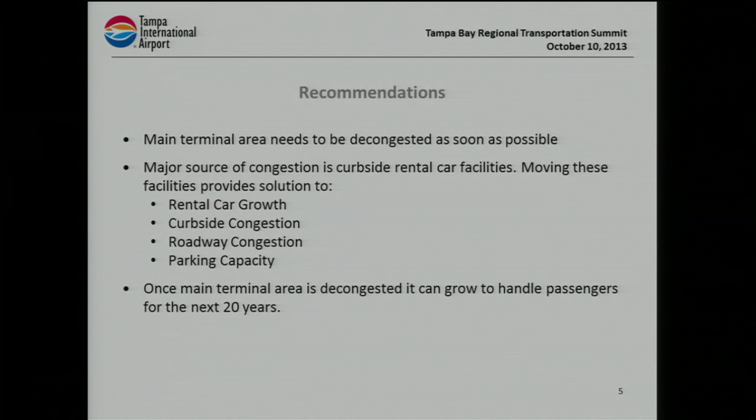Major sources of congestion are solved by moving the rental car growth problem, curbside, roadway, and parking capacity congestion. And so here it is.

We talked earlier about what our vision is and what we can do to top what George Bean and the guys did. I challenged our master planners. They came back to us with their first phase, and they said, okay, we're going to build another parking garage, and we're going to build another rental car center over here. I said, that's really boring, that's not very imaginative. They said, yeah, but it's cheap. I said, it's cheap and bad. Go back to the drawing board and do something better than what George Bean did. And I think we're there.

This calls for a $935 million first phase. It creates more than 10,000 jobs, and it's underway right now. So this isn't a regional plan that's on the shelf. This is a plan that's happening today.

The major projects are a 2.3 million square foot consolidated rental car center. So we'll move all of our rental car operations to the south, right here. And that does a number of things. It takes 8,500 cars off our roadways, because these people have to come up and back to our main terminal. This is an area of congestion.

What we have to do is move them away. Now you can get right off the highway and return your rental car, and we never interact with those 8,500 car trips a day.

That'll be connected - we're going to go back to the future and use George Bean's idea - by a 1.3 mile automated people mover. This isn't an idea that's being floated about. This is something that's been approved by the board in concept. The board will vote on the budget for this in November, and the design build contracts will be let in the first part of next year. So this is underway, and it'll happen by 2017.

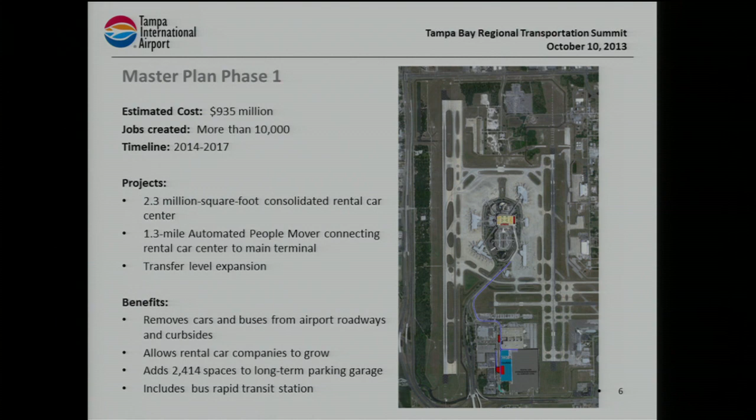So you could take - one of these days we'll get a nonstop bus to downtown Tampa. I know I've said this before, I got a nonstop to Zurich, but I can't get a nonstop to downtown Tampa. One of these days there's gonna be a bus that drops me off right here, and I'll get on this train and come right to the terminal. It's coming. Okay, so a little bit more detail on this.

We will have the APM, automated people mover, travel here. It'll be up about 85 feet in the air, go under taxiway J. We'll have to reconstruct this taxi bridge, go along here and stop first at the economy garage, which exists today. This is served with a busing operation. We'll get rid of all those buses, save the money, save the labor, save the environment, take those buses off the road, and those people can ride on the train.

And then the next stop will be the Consolidated Rental Car Center, which will be spectacular. It'll be 4 floors, with fueling capability on each floor. The rental cars can be turned around in 15 minutes from the time someone drops it off till the time it's re-rented by someone else. Hugely efficient. And then, of course, a bus rapid transit station.

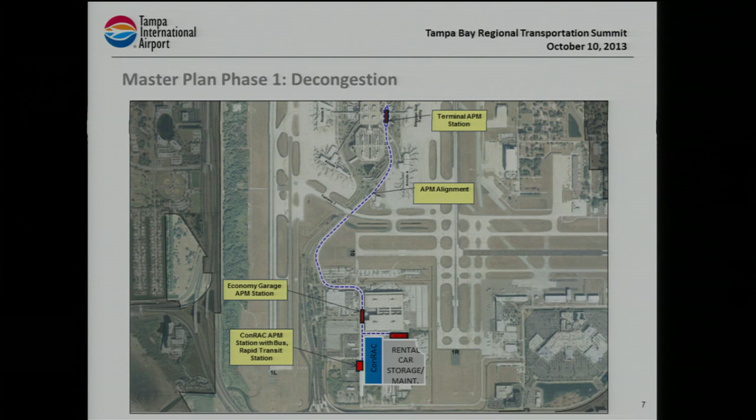Other buses off airport hotels can drop off there too, and we take them off our roadways and decongest all of those problems. Ultimately, we'll also move our employee parking down here, which is up on the north side of the airport. It's a busing operation, and we have to cross an active taxiway, which the FAA frowns upon for aircraft-bus interaction.

So they kind of like this plan too. When you're done, we have about 15,000 people in this area between economy parking, employees, and rental car guys. So this is where transit-oriented development comes into play. We have to develop real estate at the airport to drive our revenues up, because we know our airline revenues are going to be flat.

So we put a gas station down here so the rental car guys can gas up and return their rental car. Or if you're at the cell phone lot, you can gas up, get something to eat, wait at the cell phone lot. You could even pick your party up right here at this curbside, or they could take the train down to the south. You just tell them, I'll pick you up at the rental car center. It creates another curbside, thereby reducing that congestion.

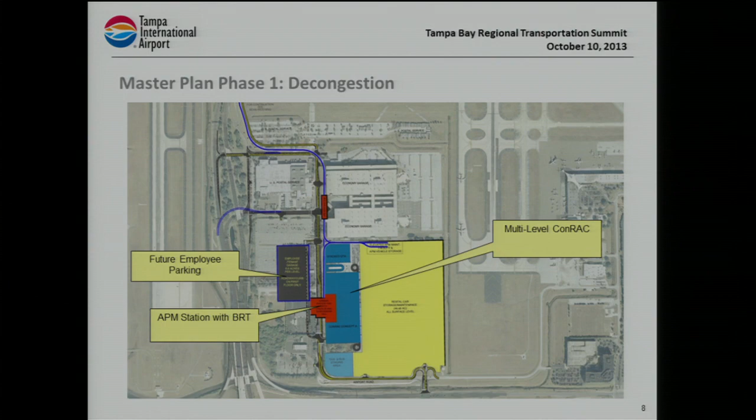We could build a hotel here. We could build office buildings here. There are a lot of opportunities. You could put a pet hotel down here for people who travel and have pets - this is a new popular trend. This whole parcel of real estate becomes enabled by this rail connection.

This is what the automated people mover station will look like at the terminal. It will actually connect to the terminal in between airsides A and C, so you use shuttle bays for A and C. There's a smoking deck out there if you can envision that - when you leave today, go take a look. That's where this will be.

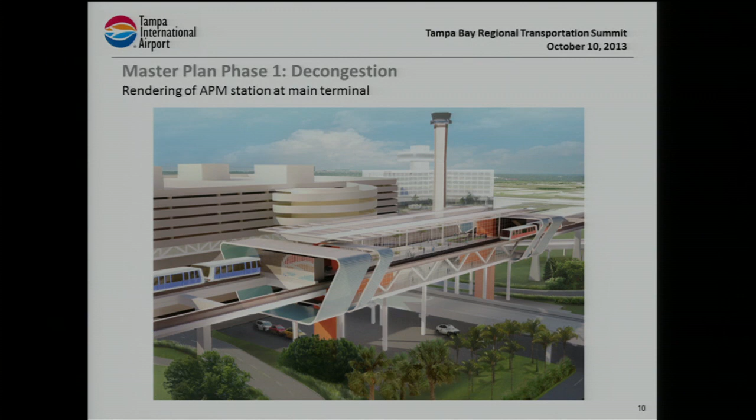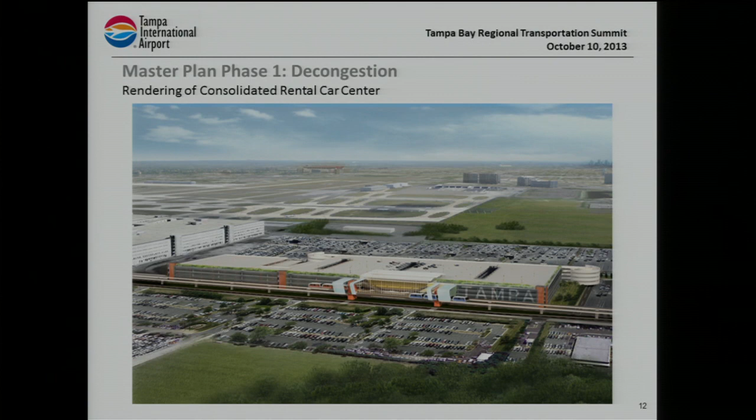This is the Consolidated Rental Car Center in the south. This is what it'll look like. Your train will pull up, you'll wheel into a great lobby, and Hertz, Avis, and all the guys will be there with your car ready for you. Okay, now a really exciting part of this is, and this is where the George Bean thing comes in.

You know, it wasn't easy to get those people movers built, especially back then. It must have been very costly, very expensive, but they said, we're going to do this right, and it's our chance to do it right. I think the vision here is to take this first phase, which the airport has funded, and build it on down to a great multimodal center.

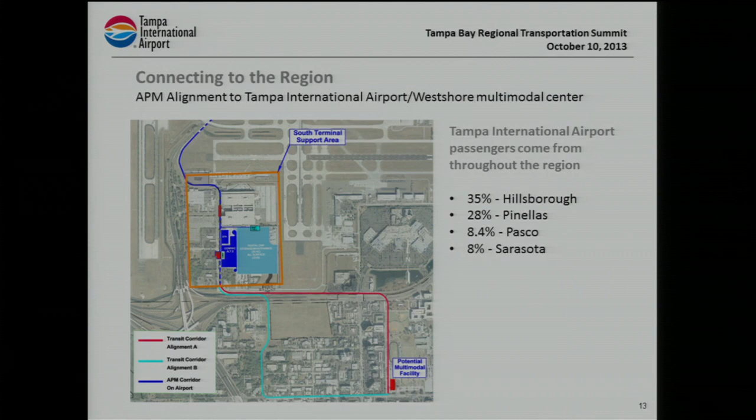That'll be called the Tampa International Westshore Station. And it would look like - think about this, Rusty was talking before about the station in Miami - it would look like an airline terminal. This terminal would look like an airside at Tampa International Airport. People from Brandon, Tampa, Sarasota, Pasco, Hernando, all around the region, St. Pete, the beaches, can arrive at this terminal, get a boarding pass, check their bags, get a cup of coffee, get a sandwich, and get on a people mover system that'll take them to a terminal and then get on their plane.

Now, how cool is that? Can we do this? We can do this. All right, I just heard you, so that means it's happening. Let's go do it. And this can happen in our time. There's no reason it shouldn't, and there's no reason we shouldn't be thinking in these terms.

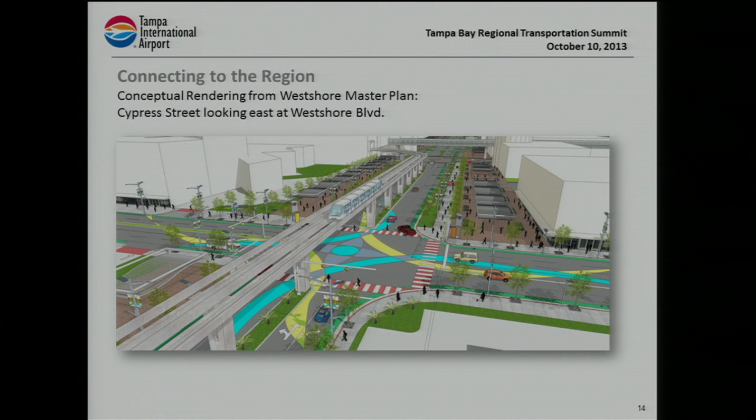This is what the connection might look like to Westshore, from our station all the way down to Westshore - this is a view looking along Cypress. Now, this is in the Westshore Master Plan, a rendering in the Westshore Master Plan. So when you have a rendering in your master plan, it means it's going to happen, right? Okay, so here we go.

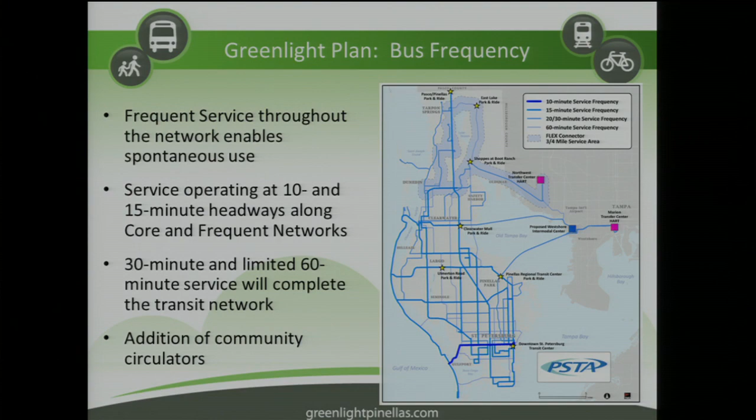If I show you this map today, all these blue lines are high-frequency bus routes crisscrossing the county. If I show you that map of today, it only has 2 blue lines on it, including those that cross over to Tampa and to the airport.

When I talk to people that use the transit system now, this is what they're most excited about: extended hours of service. This picture is obviously not in a northern Pinellas location. North of Ulmerton Road, our buses never see the dark—they never turn on their lights because the buses end at 6:30 in many of our lines. So all the routes would run at least till 10 p.m.

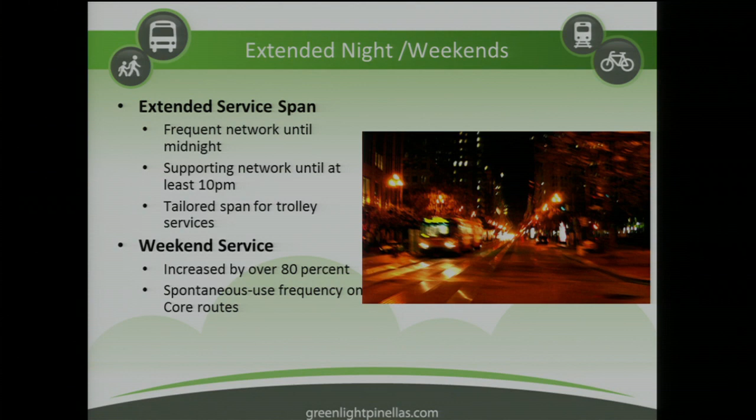And then our very popular trolley tourist services along the beaches would be dramatically expanded, and those would run even later. I took this picture myself from the back of a Central Avenue trolley bus in downtown St. Pete on its way to the beaches at 8 o'clock in the morning on a Saturday. A lot of times those trolleys are used by tourists, but not at 8 o'clock in the morning on a Saturday—they're still sleeping, and it's packed.

And why is it packed? It's because it's full of workers—people wearing Hawaiian shirts that are going to make the beds and do stuff at Trade Winds. That's who's riding. There's no parking available to most of the employment that work at the hotels and the tourist-oriented businesses along the beaches. And that's what this would do, is provide a connection that people don't have today in many ways, a way to get around Pinellas County in a way they don't have today.

Now, the plan also includes in the future a passenger rail system from downtown St. Pete to the highest employment area of Pinellas County, which plans on growing in the Gateway area, and then over to Clearwater. And in the future, our plan does include connections across the Howard Frankland Bridge to Tampa, to the Westshore Intermodal Center that you just heard about, and to downtown Tampa.

Now, why was this included? Pinellas County needs to grow again. It needs to have economic growth and development. We are a built-out county, not able to grow maybe in ways other parts of the Tampa Bay can, and we need to find a transportation solution.

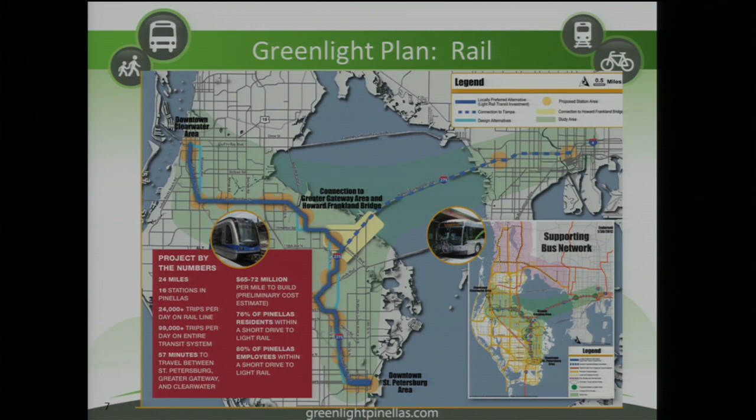We really have no more room to expand our roadway system. And so that is what this initiative is about, improving Pinellas County for the future. If folks don't think this will help Pinellas County, then they shouldn't vote for it in 2014.

The transit-oriented development potential of that rail system has been studied and planned, with a vision for the future of Pinellas County about turning our low-density development, which is fully developed across the entire county, and allowing us to develop upward, which is the only way to go, in more intense developments around those 16 proposed stations. But that also preserves our neighborhoods and our beaches that we're very proud of and don't necessarily want unfettered demand to just grow there.

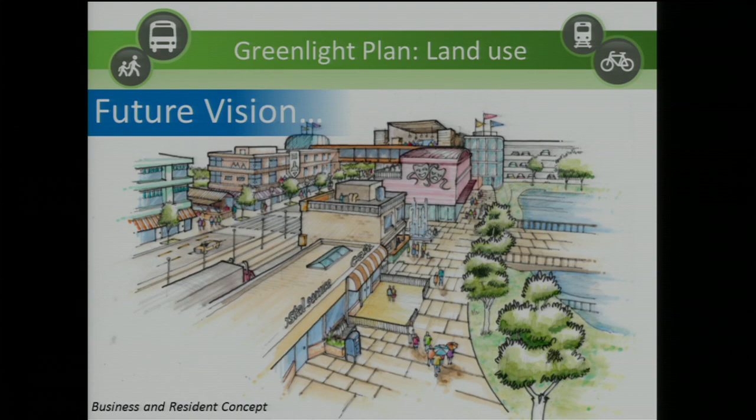So we're moving forward with this. Again, it's on the ballot for November 2014. It's not going to be easy, no doubt. Going out and giving my presentations, people say, well, I've heard of Greenlight Pinellas because I've seen your signs and your little stickers and stuff like that. And they say, are you trying to make me a vegetarian?

No. This is about transportation investment and moving our county forward. And it's good that we have a year, and we've been working at this for a while, to get more and more people aware of what's going on, to build the awareness of how mass transit can benefit them. We'll see how it goes, and we'll just keep working on this.

We also know that we have to deliver on this plan, that I and PSTA and the leaders of Pinellas County have to be accountable for this plan. So we are doing everything we can to do our due diligence and make sure this works, that we have a plan, which I think we have a very good plan, but that we follow it. So we've engaged HNTB and Ernst & Young to review all of our numbers and give another check to develop a 50-year plan for how this plan can be sustainable and affordable over the long haul.

So again, that's what the Greenlight Pinellas plan is. There's a lot of people in here that are from Pinellas that are really active in helping with this, and I thank them for that. And then folks that are across the region, I think we could all use your support in getting the word out and talking about this, asking questions now, so that by November 2014, more and more people are aware that this is happening. Thank you very much.

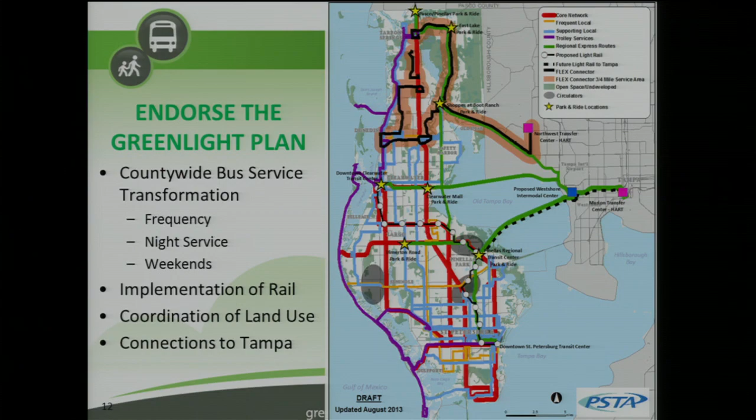We kind of saw what's happening on one side of Hillsborough. Now we're going to see what's happening to the county on the other side.

Yeah, that's fine. And how do I advance? Perfect. Well, thank you, everyone. And Ray, I think you did a great job setting this up.

Brad's got population density. We don't, and really public transportation can work for both. So I think Congressman Mica put it best - this is probably the 'how you dust yourself off' presentation. So just to set the table, how many of you here are from Polk County? Okay, great, 4. Mission accomplished.

So let me just set the table with what we currently have for public transportation in Polk County. We have basically 3 systems. We have the Citrus Connection, that's the Lakeland-based system that connects with the greater Winter Haven system, which is called Winter Haven Area Transit - worst transit name ever, WHAT. And we have the Board of County Commissioners that provide the transportation disadvantaged in the Medicaid program.

Now, to put into context our transportation disadvantaged program and how big it is in Polk County, the Brookings Institute recently rated Polk County the 7th most impoverished suburban area in the U.S., which means that 27.8% of our population is at or below the poverty line, which means that 27.8% of our population is eligible for transportation disadvantaged.

So what we've done over the last 2 years is, through handshakes, we've decided to coordinate and consolidate all of the public transportation providers in Polk County under the banner of Polk Transit.